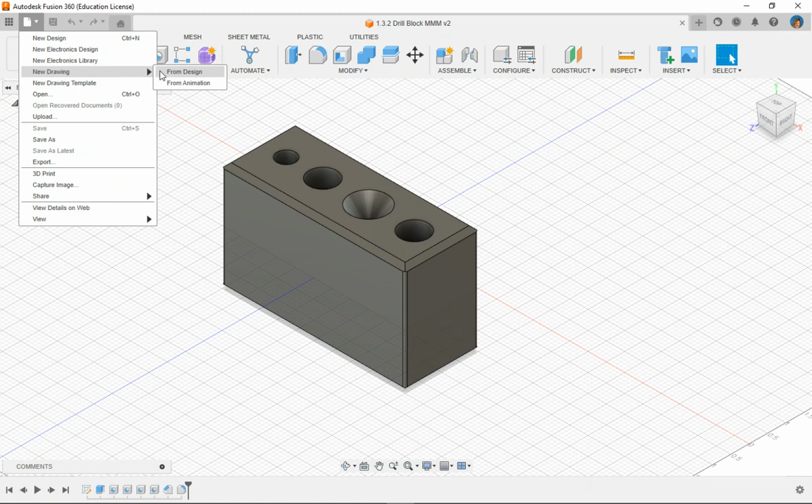Okay, once you have it open, you're going to go up to File, then you're going to go to New Drawing, and From Design. Again, that's File, New Drawing, and From Design. When you do that, it'll open up a text box for us. And looking at the information here, starting off with the reference and contents, we want to keep it as full assembly. Drawing, we're going to keep Create New. Template, we're going to do from scratch.

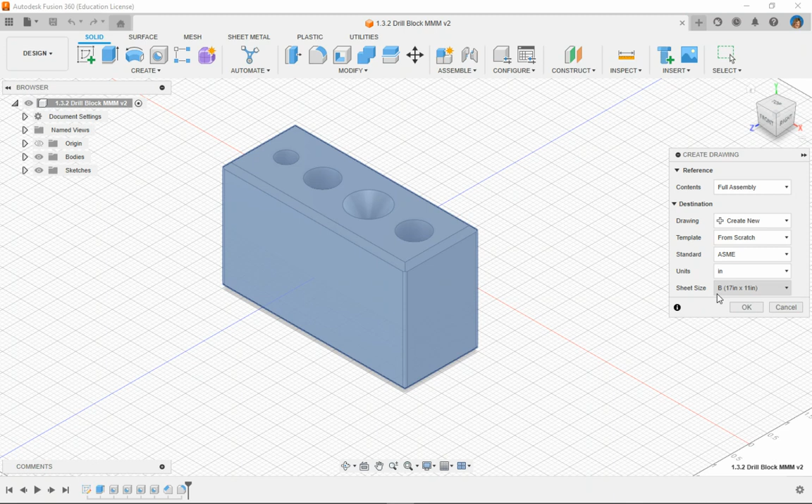Standard, we're going to do ASME. We have ASME and ISO. ASME is the one we want to use. Units are in inches. That's what we created our part in, our design in. And sheet size, for right now, we're just going to leave it as size B. And if you look down, you'll be able to see that there's other different sizes. But for our purposes today, we're just going to leave it as size B. And click OK.

Once you click OK, it takes it a little bit sometimes to open up in the drawing window. But once it opens up, you will see there's a drawing view text box. First thing you should notice is in appearance, orientation should say front. You want to make sure that says front. We always start with our front view. Style, we should have the second box here checked, which is visible and hidden edges.

We want our scale to be 1 to 2. If it's not 1 to 2, you can just click in the box and change it to what you need it to. We're going to leave tangent edges. We're going to leave everything else basically the way it is. So you want to make sure it's front, visible and hidden edges, and 1 to 2.

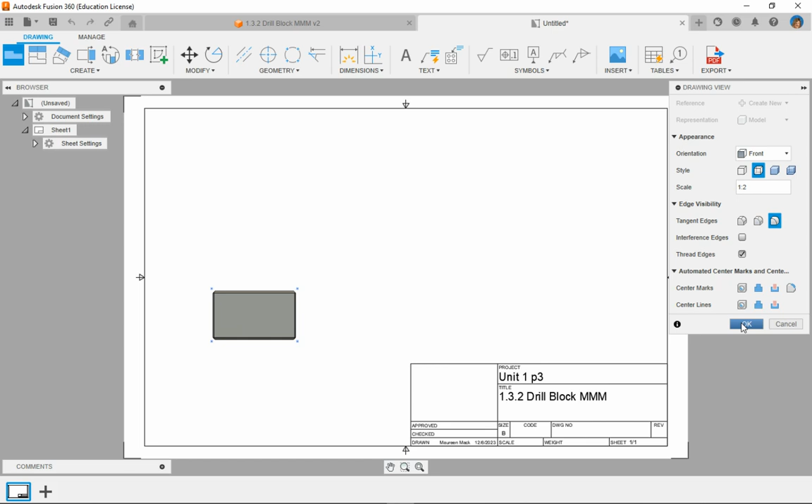Then you're going to come over here, and you'll see that you have a rectangle, and it says Place Base View. We're placing our front view, so we're going to put it down near the lower left corner. So I'm going to go ahead and drag right about here, and I'll click. Once I click, I'm going to go back to my drawing view text box, and I'm going to click OK. Now you can see that the front view of our multi-view drawing has been placed. We still need to do our top view, our right side view, and our isometric view.

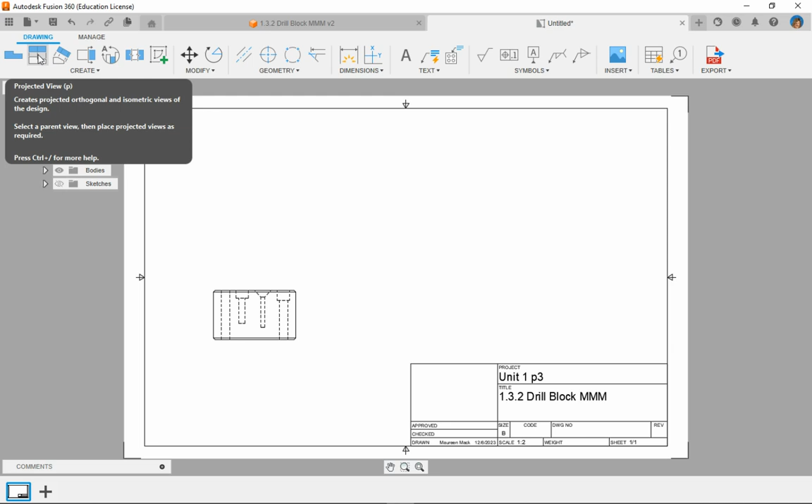So I'm going to go back up here. I'm going to go to Projected View. You notice it's the second icon in. It says Projected View. Click on Projected View. And come back down to your front view. You're going to click on the front view. Then you're going to drag up a bit. You'll notice it kind of changed the way that the design looks. Now once you get it up a little bit, you're going to go ahead and just click, and that places the top view.

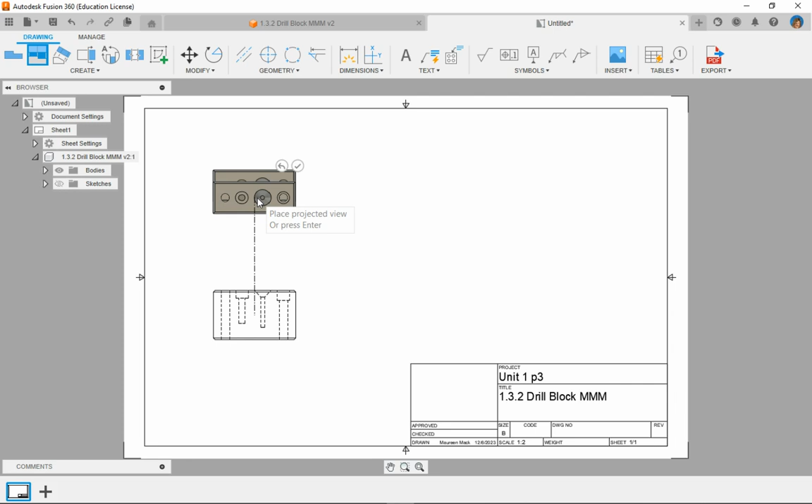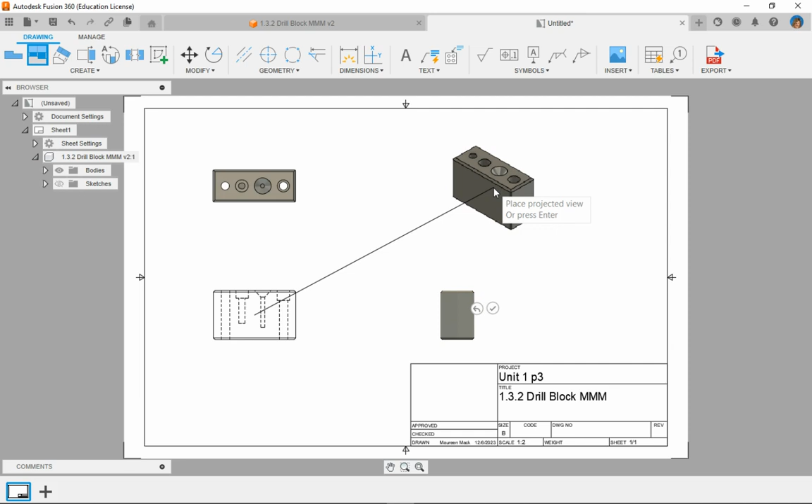I'm going to go back down towards the front view, and then I'm going to go to the right. I'll go out to the right a little bit, and then I'm going to go ahead and click. That'll place my right view. I'm going to go back to the front view. This time I'm going to go up diagonally to the right corner. You should recognize this as the isometric view. I'm going to go ahead and click. Now you can either press enter or you can click this check mark right here. Click the check mark and our drawings are complete now.

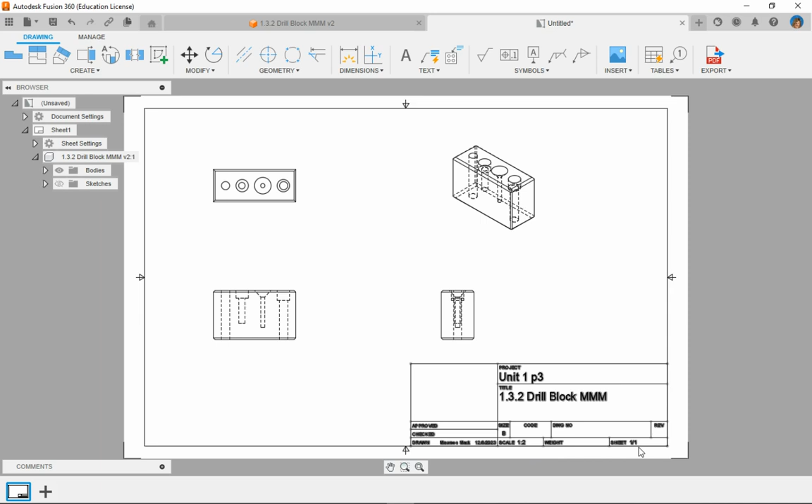And everything in the title block here for your page should be right. This should have your Unit 1. The title should be 1.3.2 drill block with your initials. It should say drawn by, it should have your name and the date and the scale. Okay, and this sheet 1 of 1, you're only doing one sheet.

So at this point, we want to go up and save. So I'm going to go back up to File. I'm going to click Save. It's going to automatically name it 1.3.2 drill block drawing. You can only save it to the same folder where the actual design was. So you're going to go ahead, Unit 1, and we're going to click Save. And it's updated with the name. So we have our drill block and we have our drawing.

Now, to be able to get this into a format that you can share it in Canvas, up here on the toolbar, you'll see it has PDF and it says Export. If you click on that, it will open up some choices. We want to export as a PDF. Okay. So we're going to click Export PDF. We want all sheets. You want to include the line weights. You do not click the Open PDF. Line weights, and then click OK. I clicked it too many times.

You want to keep the name with the drawing. It's going to be a PDF file. Do not click Save to a project in the cloud. Over here, where right now it says Unit 1 MM for me, I'm going to go to this drop-down arrow. Sorry. Let me bring this up here a little bit. Down here, it should say Save to my computer. And right now, it says Save to my computer, and it has it as downloads. I don't want it to go to downloads.

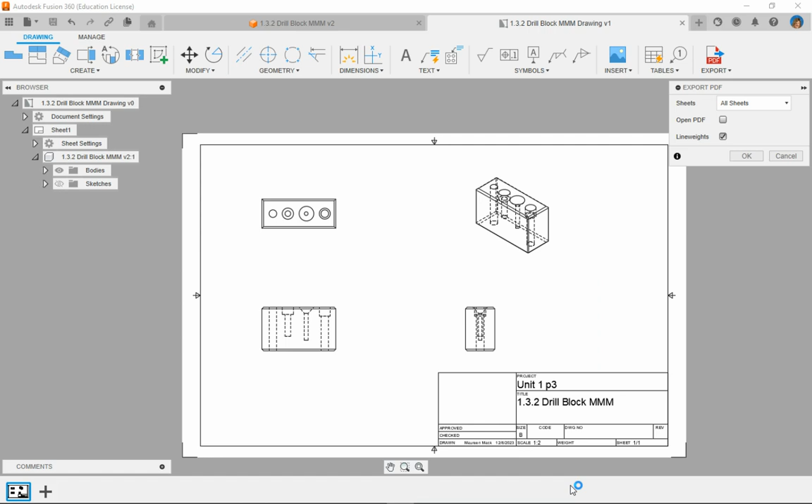And it should be saved at this point in your OneDrive as a PDF. Now you can go ahead and upload this assignment in Canvas. And that is all for this one.